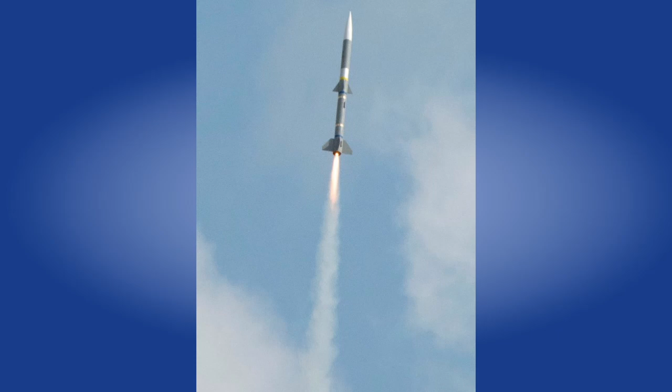In addition to that, I fly rockets, and that's one of the things we're going to talk about today. In particular, I enjoy scale rockets. This was back when COVID was rampant, and you can see that's a 3/4 scale AMRAAM air-to-air missile. And you can see that flies as well.

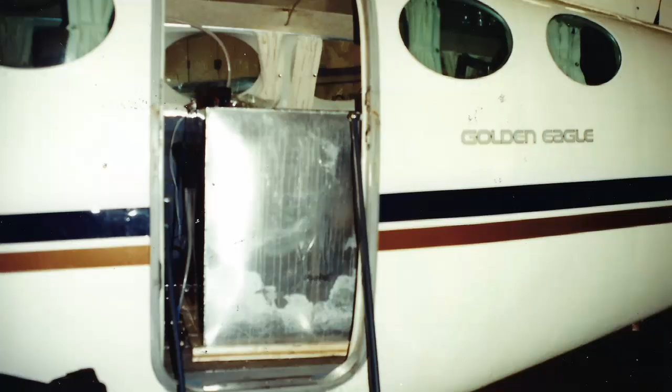So when you enter a Cessna 421, that's not normally the first thing you see.

That's a 100-gallon fuel tank. There were two of them in this airplane. We took all the interior out of the airplane and packed it in the nose luggage compartment and the wing luggage compartments, then put two 100-gallon tanks on board the airplane.

The reason for this is the first one I delivered in May, so I could do the standard Blue Spruce route, going from Goose Bay to Narsarsuaq at the southern tip of Greenland, to Reykjavik in Iceland, and hit Europe from there. But this particular airplane we were delivering in early February, and Narsarsuaq is not a place you want to be in Greenland in early February. So the only way to get it across at that time was to put two 100-gallon fuel tanks on board, leave from St. John's in Newfoundland, and fly nonstop to Santa Maria in the Azores.

Typically, when I fueled the airplane, I'd have all the doors and windows open and leave the airplane sit for 30 minutes so that all the fumes from fueling could get out before I even dared put the master switch on and start firing things up. It was basically a flying gas tank.

With the onboard fuel, I had 435 gallons of avgas available to me, which gave me almost 10 hours of flying time, about 8 hours to Santa Maria in the Azores. And I got a license from the FAA to operate that airplane 35% over the licensed gross weight of the airplane, and we used every bit of it.

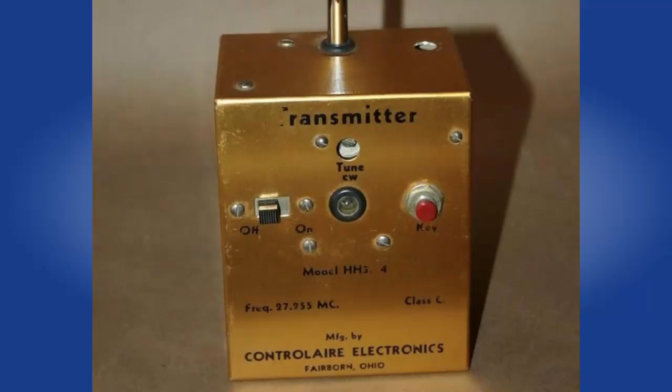All right, so next slide. I want to start this by talking a little bit about what's happened over the years in radio control airplanes, and then we'll jump off to other things, like what's happening on the frequency.

So early RC, and this is a transmitter from about the mid-60s, involved a very simple device. You had basically a wireless telegraph, and you'd key it up, and that would cause a relay to close. The relay closing would cause a rubber band powered escapement to turn, which would move the rudder on the airplane.

Originally these huge transmitters sat on the ground, and you had a button in your hand. As electronics got better, you had something more modern you could actually hold in your hand and push the button. Typically they were on about 27 megahertz, and everything back then was on 27.

So if you were flying your radio control airplane and somebody with a boosted CB keyed up, guess what? Your rudder moved and would stay over full until he got done transmitting, or you got done transmitting. From there they also got some ham-only frequencies in the 53 megahertz range.

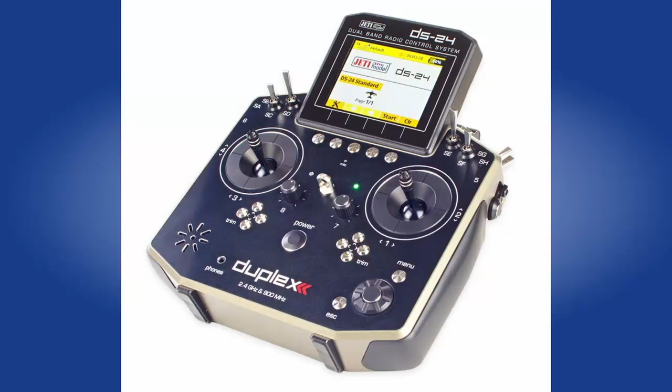Now, you can see that this looks just a little bit more complicated than that other radio I was showing you. There's a number of things this radio does that are really quite remarkable.

Not only am I sending out a signal to control my airplane, I'm getting telemetry back. I'm getting all kinds of telemetry back. So just to give you an idea, let's go to the correct slide.

I'm getting telemetry on signal strength, battery current draw, current used, air temperature, engine temperature, fuel level, system brake pressure, altitude, airspeed, GPS position, engine RPM, fuel flow, and a variometer, which tells me about my rate of climb or descent. I'm getting all this back. You can see that's one of the boards.

So I have a screen there, and there are a number of things I can do. I can have it change screens as I'm changing modes.

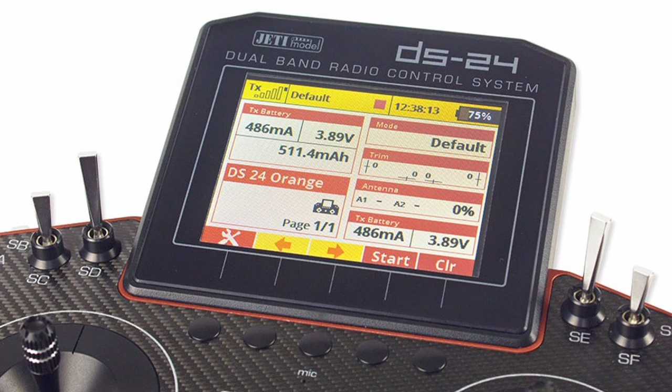So while I'm flying, just up and flying, I may be interested in how much fuel I have left or how much battery voltage I have left. Or if I'm flying a turbine-powered airplane, how my turbine engine's running, what the fuel level is, and I can have it tell me these things. It can say, hey, you're at 85% fuel, and I can tell it how often I want it to do that.

But now when I switch for landing, I'm switching modes, and my interest may be a little bit different. I may be more interested in airspeed than how much fuel I have left or what my engine temperature is.

I can also set any warning I want. When I hit a certain level, it'll give me a warning. One of the airplanes I'm flying right now, a small airplane, has a 3,000 milliamp battery, and it tells me things like 1,800 milliamps used. Then when I get to 2,200 milliamps, it gives a stronger warning that I've used 2,200 milliamps. So really some remarkable things.

Not only does it tell me these things, not only do I have live telemetry, it's recording everything on the transmitter. So I can go back at any point in the flight and see what my engine temperature was, my altitude, or my airspeed if I have a problem. Pretty remarkable things in modern day electronics.

We've gotten away from the 27, 53, and 72 megahertz bands, and these are now operating on 2.4 for a lot of the systems. The system I just showed you, one of the reasons I got it, operates on 2.4 but also on 900 as well.

The beauty of that is the whole world is operating on 2.4 right now. So if I'm flying in an area where I'm out in an open field but there are a lot of houses around, everybody's got a modem in their house, everybody's running 2.4. These transmitters only have 100 milliwatt output, so it's not a very strong signal, making it easy to get swamped.

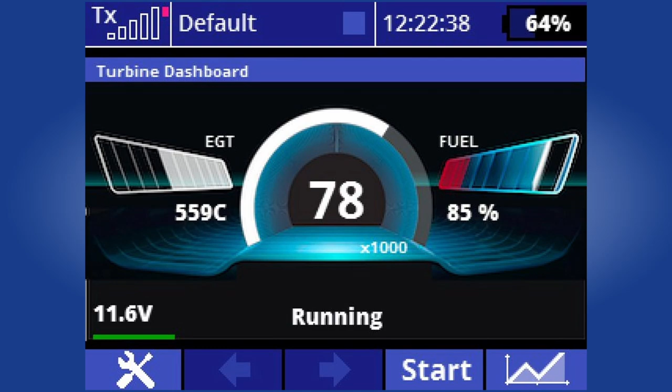All right, next slide. So coming from RC to rocketry, many of you raised your hands or told me you had flown rockets before. Rocketry has come a long way.

We basically have two classes. There's a number of classes, but I'm not going to get into it. Basically we have a big split: model rocketry and high-power rocketry. Model rocketry is anything up to 1,500 grams total takeoff weight, roughly 3.3 pounds, or 125 grams of propellant, or a G motor, whichever of those you hit is the limit.

Next. Yeah, just, there you go. One more click. All right, so big or small, rocketry hasn't changed that much.

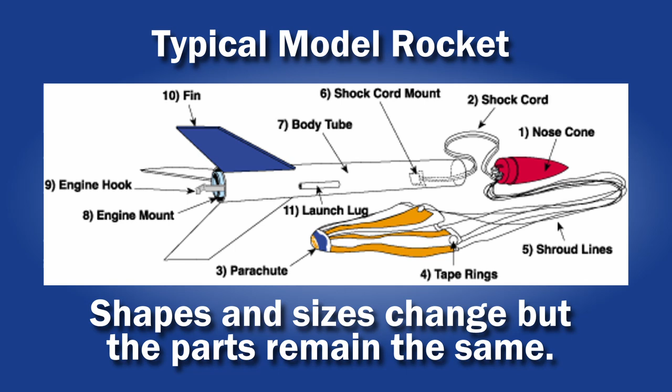Next. So the typical stages of flight: we have ignition and thrusting. Once the motor stops thrusting, the rocket coasts, and that's where you're actually getting most of your altitude—during the coast. Think of it like shooting a bullet out of a gun: it's accelerated for a very short period of time, but the coast is rather substantial.

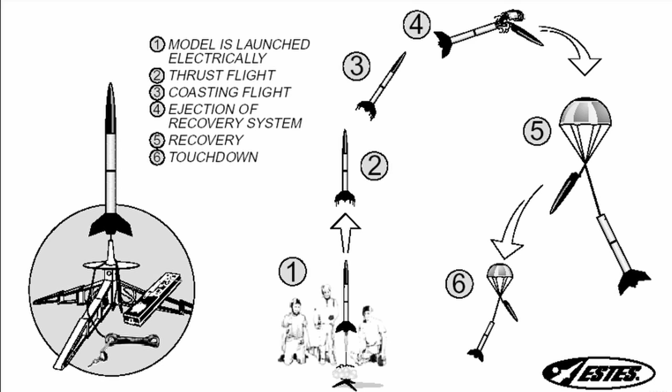When we reach apogee at the top, we need to do something to slow the rocket down. We deploy our recovery device, and the rocket floats down under parachute—a typical model rocket flight—and we get to do it again and again and again. I have some rockets with over 30 or 40 flights on them.

Those rockets—the larger one on the right probably goes 75 to 80 feet. The one on the left would go 120 feet.

I hadn't checked recently, but in 1993, I set a national record for quarter-A rocket glider. And to my knowledge, that still stands. So I've held for a long time a national record in rocketry, but for some very, very tiny rocket gliders.

So back to rocketry, just generally speaking. The standard Estes size rocket—this I'm holding right here is an Estes C motor. It's 2.75 inches long, 18 millimeters in diameter. We're going to talk about what a C motor means here in a minute.

I have 4 motors there that are all C6s. I have a C60, which we use for staging, a C63, which would be great for George's rocket here, sending it roughly 300 to 350 feet high, a C65 for mid-level, and a C67, which has a longer delay. The difference between those is the delay time—the time it takes from when the rocket motor stops burning, in coast, to when it fires a charge out the front to deploy our recovery device. A C motor in a little model like this Streak can send it 2,000 feet high.

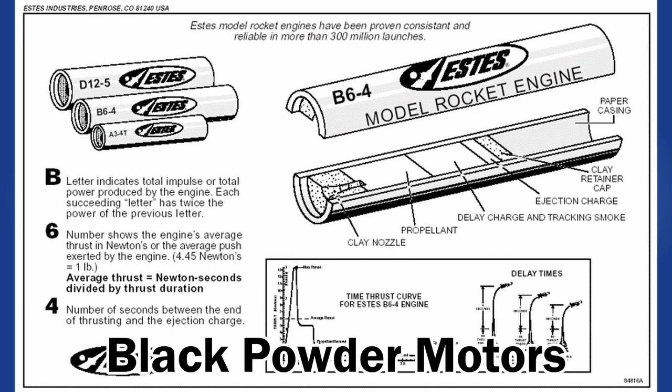The 6 in that C motor is telling us the average thrust in newtons, and there's roughly 4.45 newtons in a pound—so it's a little over a pound of thrust for that C motor's average thrust. The fact that it's a C motor tells me it's between 5.1 and 10 newton-seconds of thrust. The best way I can illustrate that: I have the C6 sitting there, and at home I have an E6.

You're thinking, well, one's an E, one's a C, but they're both 6s with the same amount of thrust. That's correct, except the C burns for just a little over a second, and my E burns 4 times that long. So when we talk about how much thrust is developed—basically a newton-second is the amount of energy it takes to accelerate 1 kilogram of mass 1 meter in 1 second. That's the short story of what a newton-second is. It's a measure of impulse—how much total impulse does this motor have?

So this is a color illustration because we're getting old—we don't like black and white, we like color.

Again, this is more of a C motor. Notice that this one is pretty full all the way from the bottom to the top, and could be any of the C0, the 6, or the 7. The difference with the 0 is it doesn't have any delay and doesn't have any black powder charge at the front. We use that for staging—we put two of those together, one on top of the other, and when the propellant wall ruptures at the top, it sends flaming propellant into the one above it, it lights it, and we have a two-stage rocket.

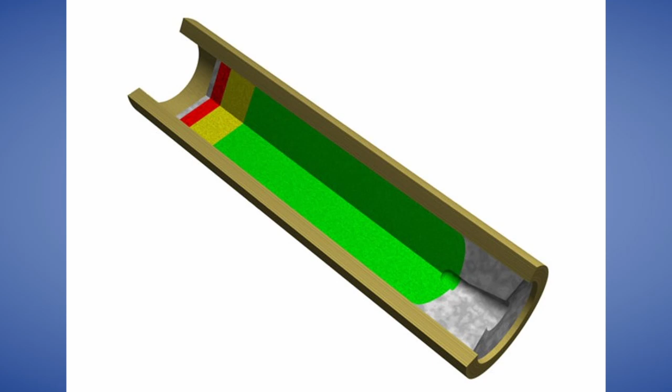So a typical C motor flight on this, if I use an A motor, I may get 200 feet, a B motor 500-600 feet, and probably a C motor would go to 1,100 feet.

For those of you who built rockets as a kid, this was a model rocket from Centuri, which Estes bought out in like 1974, 75. I redid it recently because I built that in the 70s, so it was getting a little long in the tooth. I did it in White Sands Missile Range colors. If you ever walk through the White Sands Missile Park, that's how their Honest John is done.

I love classic rockets, the ones from the 60s and 70s. This is an Estes Goblin with a D motor, which is twice the size of a C. It would go roughly 1,400 feet, which is again a very, very impressive flight. I mention these altitudes, and to you they're just numbers, but trust me, 1,400 feet is seriously high up for a small rocket like that.

So, talking about some more model rockets. I mentioned staging. You can take a small rocket not much taller than George's here, make it a 3-stage rocket, and go to 2,500 feet. That's a phenomenal flight, and it's going to be very hard to see at that altitude, which brings me into what we use our ham licenses for, because recovering something like that can be very difficult. And then the other ones are showing clusters, which we're going to talk about next.

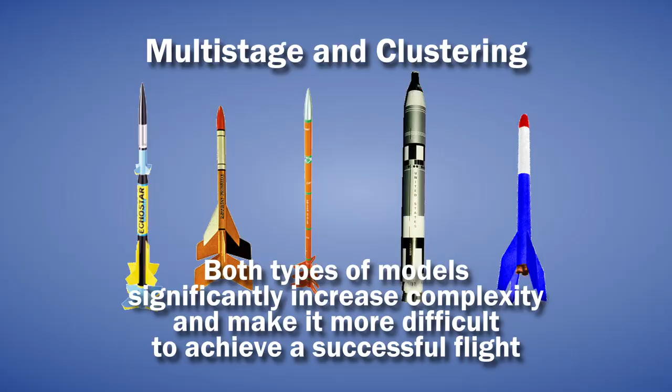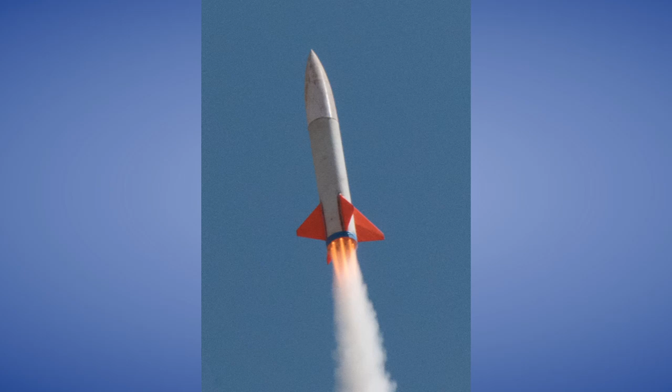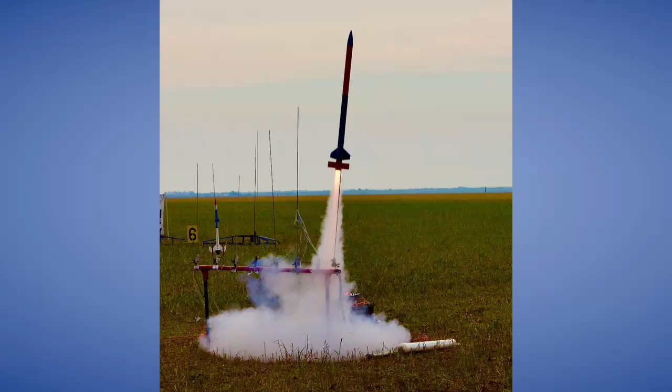Taking that same concept, this is a rocket I built years ago and have flown several times. It uses 7 C motors, just like this little motor I have here, except I have it set so they all light at once, staged to 7 more C motors. So this rocket has 14 C motors in it - 7 motors staged to 7 motors. And it's an impressive thing to see fly.

And because it's kind of big and kind of heavy, it still goes up to about 2,000 to 2,100 feet, which again is very high for something like that. But this rocket's big enough that it's a little easier to see than the small Estes.

So the question was, how do I determine the peak altitude? There are some wonderful rocketry programs out there. One is RockSim, but one of my favorites, which is a freebie, is called Open Rocket. You can load it onto your computer and build your model to determine how high that rocket's going to fly on any given motor. Some people don't like Open Rocket, but if you use it right, it's darn near perfect, and I'll talk about how close to perfect here in a second. That way I can pick the proper delay for my motors based on how high the rocket's going to go, which is important - I'll put a pin in that and talk about why the delay is so important in just a second. But that's an excellent question.

With that computer software, I can enter the altitude I'm launching from, the temperature, wind direction and speed, size of the rocket, weight of the rocket, length of my launch rod or guide rail, and get some very important information: peak altitude, what the acceleration is going to be, making sure it's stable, how long it's going to take from motor burnout to deployment, all those good things.

You had a question? So the question was, didn't Estes make a tool that you could use to determine how high the rocket went? The answer is yes, and they still do. The problem is that single-point trigonometry isn't so great, but if you get 2 people and take an azimuth, or even 3, 2 gets pretty darn accurate. You can accurately determine how high the rocket's going to go.

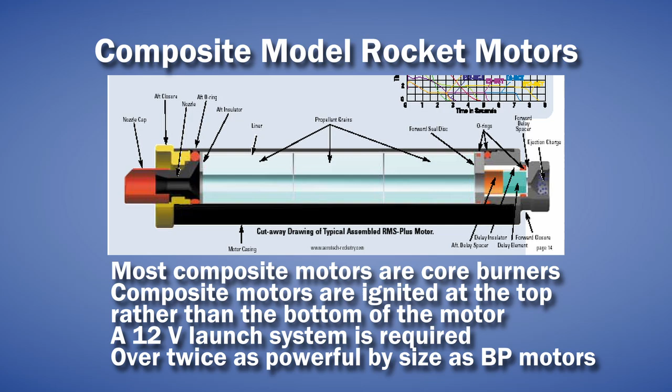This is just a nice diagram of the same thing. This would be a 2-grain motor. You can see the little split in the grain, nozzle at the bottom, the core in the center, delay grain, and there'd be the black powder charge at the top.

So just to put things in perspective - we talked about C motors, and I'm going to use C motors as my standard unit of measure, roughly 10 Newton seconds of power. Let me just take a look at my notes here.

This particular motor right here - this is the motor case that you're looking at. The fins are welded straight to the motor case, so there is no body tube per se. The body tube and recovery go on top of the motor case. This motor is a P-class motor, a P8500, roughly 72,000 Newton seconds of thrust, or the equivalent of 7,200 C motors all going off at the same time. I got a little video of this thing flying later. The motor alone on this is 110 pounds. So you can see I'm going from one extreme to the other.

This is a picture of this rocket I have flying right here, and I'm going to talk more about this in a second. In this particular picture, that was on an I-285. It was a relatively low altitude flight, just shy of 2,000 feet, to test tracking and electronics before flying it on big motors. I've flown it up to about 9,300 feet. In a couple of weeks, I may try pushing a little harder, up to about 11,000 feet.

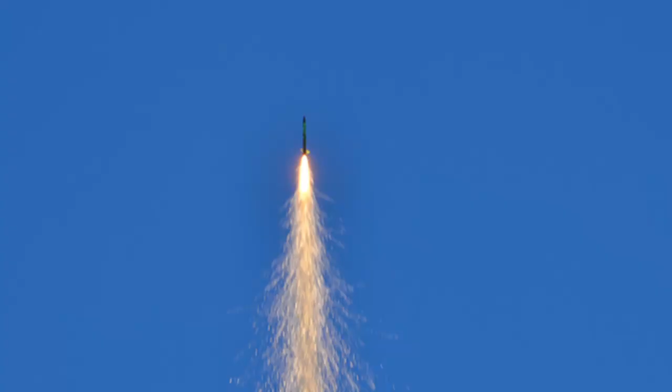Adding magnesium to the fuel produces what we call a sparky motor, and it produces quite an effect at the loss of impulse, because you're adding mass in the form of magnesium to create this effect. You're losing thrust in the rocket, but it puts up a very interesting flight. These are just a couple of the variations, by no means all of them - you're going to see rockets with red flames, green flames, sparky motors, or even black smoke. It just depends how we're mixing the propellant.

So here's what we want to see at the end of the flight: we want to see a parachute come out, we want to see the rocket come down under chute. This is your standard model rocket deployment - the parachute comes out at the top. Hopefully it comes out at the top.

So going back to your question before about knowing how high we went - as these rockets get bigger, putting the parachute, or our recovery, at the top becomes crucial, because at high speed putting a parachute out does ugly things. I've seen parachutes come out at close to Mach 1, and that is very ugly, I'm here to tell you. Even if it's getting most of the way up to the top, if it still has a lot of upward vertical movement and you put out the parachutes, it's going to be very hard on the recovery system. It could rip the parachutes to shreds, it could separate the shock cord. There's a problem - same thing coming downhill.

Once the rocket hits apogee, it starts its way down.

And if the rocket gets accelerated too far past apogee and you put out your recovery device, you're going to tear things to shreds. So it gets really ugly. It's important to know, if we're using a motor delay, how high that rocket's going to go and what kind of delay we need to hit the top.

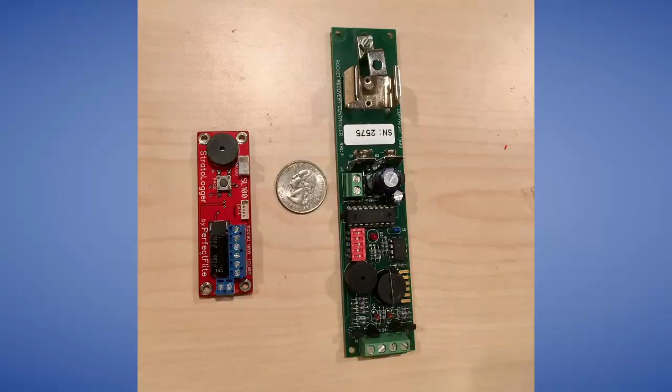So how do we get the laundry out at the top? On my larger rockets, much like this one, I'm not using the motor to get my parachute out. I'm using some electronics. This little guy on the right is an older version of a flight computer, which uses a barometric sensor that senses the rocket's acceleration and its altitude. And when it senses that the rocket's no longer gaining altitude, it'll fire a charge which will put out a drogue parachute, allowing me to come down about 100 feet per second.

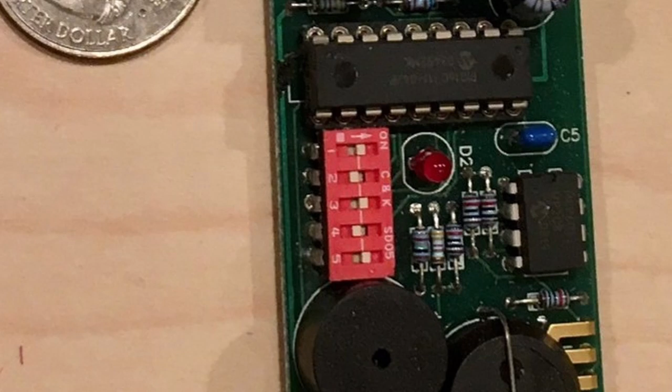And then I can program through a series of dip switches what altitude I put out the main. So anywhere from 200 feet up to about 1,200 feet, I can decide what altitude I put the main out, and the main will slow the rocket down to about 20 feet per second for a soft landing.

Now, these older altimeters had a couple issues. The first, if the rocket were to hit the speed of sound, you get a pressure wave as you go through Mach 1. The older, less capable programming and less capable sensors would sense that as a cease in vertical ascent, and it would put the parachute out at Mach 1. And that's how I can tell you I've seen many rockets that didn't like that very well. You see all kinds of pieces fluttering down out of the sky, because the second that happens, the rocket separates, the parachute comes out, is instantly destroyed, and then as the rocket's put on its side, it puts a bad load on everything, and it just tears the airframe itself to shreds.

The second thing with this particular altimeter is that it would only give me peak altitude. So when I got the rocket back, that's all the information I got. So what they started to do is this thing had a series of dip switches on it where I can program out, say, okay, I don't want you to do anything for the first 5 seconds. And that's a great idea.

So now as I'm transitioning through Mach and it hits that bump in pressure, it's not going to deploy a parachute. The problem is if I have some kind of failure, if the motor spits or quits or does something crazy, for 5 seconds it's not going to do anything. So you have to wait for that to come out.

Enter the more modern flight computer, and that's what this is. As you can see, it's a relatively small device, and I actually have one of those. After we have the meeting, I can pull that apart and you can see it. What that does is the sensor's better and the programming's better, so it understands Mach transition.

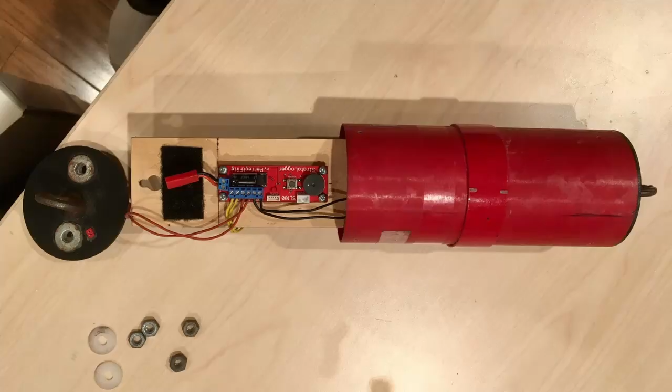Just a little bit next—this is the back side of it. You can see the battery. Notice those two tubes that are glued to the pallet.

They slide on some all-thread that's glued into that section, and you can see a switch there—just a very simple switch. It works with a screwdriver; it's nothing but a screw, and there are two prongs that come up out of the switch assembly. As I turn the screw in, it contacts those prongs and gets the altimeter doing its thing. So that's my on-off switch.

And then on the side here, if I spin the rocket around, you can see a little piece of nylon thread sticking out. That gets screwed all the way in to be flush with the tube, and that's the access for my switch that I can turn on.

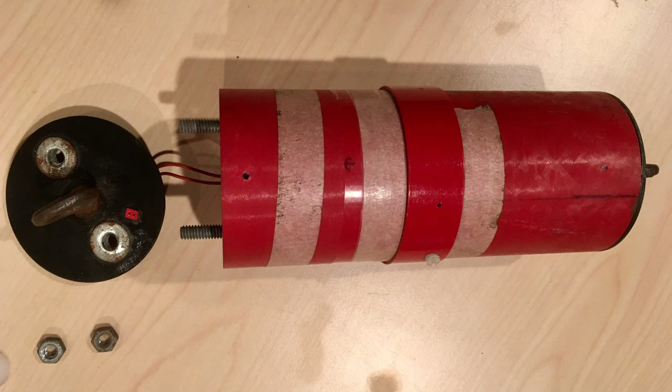That's just showing the all-thread coming out the bottom. You can see the top of the bulkhead there with a Dean's connector, which goes to an electrical match, which goes to a tube holding my pyrotechnic charge to deploy my parachutes—one for the drogue, one for the main.

The beauty of this is it doesn't matter how low or how high the rocket flies—my flight computer is going to deploy that drogue chute when it hits apogee. That's the beauty of it. I don't have to worry about how long the motor delay was, or whether I got it right in my simulation, because I've seen many rockets destroyed because the ejection charge went off too early or too late.

Going back to George's rocket here, which I talked about briefly before—I showed you the picture with the C6-0, the C6-3, the C6-5, and the C6-7. On a C6-0, if I launch this, the motor would burn out maybe 75 feet in the air, the parachute would come out and rip the rocket to shreds. If I fly it on the C6-3, because this is a relatively big, heavy rocket, it's going to reach apogee, put the chute out, and that's probably going to be pretty optimum.

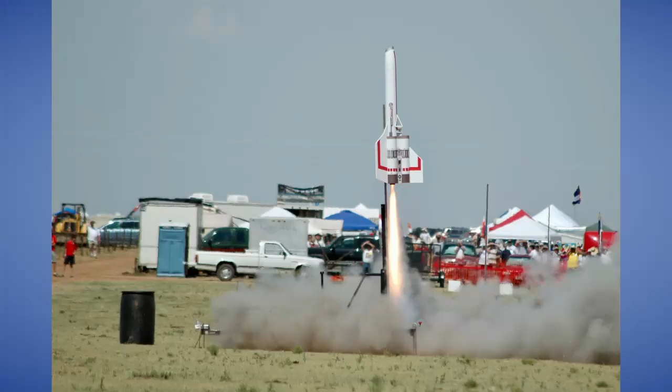The reason I brought this picture and included it in this presentation is not so much to show you I was hanging out with the Hooters girls, but to point out that unlike the other rockets, this is not a very aerodynamic vehicle by any stretch. The nose cone front is slanted, and it's got all kinds of weapons pods and other pods sticking out. There's no place I could expect clean airflow over this rocket for deploying a flight computer, which creates a problem because I don't want that flight computer to prematurely deploy, or delay the parachute deployment.

I love this picture for a number of reasons. On this particular day when we flew this rocket, there were about 2,500 people out there and the wind was howling. I looked at him and said, I don't think we're going to fly this thing today. And he said, well, let's get it ready for flight. I said, why? And he said, well, we're out here, what do you plan to do? So we did it, and it took us about 3.5 hours to get everything loaded and packed and ready for flight. About 10 minutes after we got it ready, the wind just stopped.

I mean, absolutely stopped. We grabbed this thing, and it's 65 pounds, and we go running out to the launch pad not knowing if the wind's going to kick back up. We get it loaded and send this rocket up to about 5,300 feet, which is a very impressive flight for a rocket like that. The parachute comes out, we're high-fiving each other, and this thing drifts about 1.5 miles away. We go out to recover it, excited and celebrating.

Then we pick the thing up and realize we didn't think this through. We have a 65-pound rocket. Now it doesn't have propellant in it, so it's maybe 57 or 58 pounds, since we burned off about 7 pounds of propellant. We have to carry this back. Wasn't a good plan, but the rocket did put up a dynamite flight.

So we needed something else to make this work. Enter a different kind of flight computer, known as an RDAS, Rocket Data Acquisition System. This uses accelerometers to figure out what the rocket's doing. It does have a barometric sensor too, so we could do things barometrically, but in this case we programmed it to use accelerometer data only. The accelerometer senses the rocket accelerating, then stopping and leaning over. It has accelerometers in all axes, which becomes very important when we look at how the rocket flew, things like roll rate and pitch change throughout the flight.

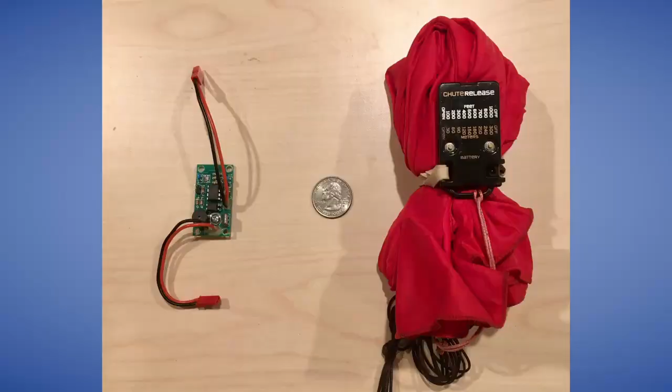A couple other interesting devices here. This little device on the left side is one of my favorite devices. It's a kit made by a company called Egg Timer Rocketry, and it's referred to as an Apogee. What it does is use a barometric sensor.

I can take some of my older model rockets, maybe something just a little bigger than this, and outfit it with that Apogee, and I always know the chute's going to come out right at the top, regardless of what motor I fly, regardless of how windy it is and how the rocket weather vanes. When it reaches peak altitude, it fires that charge, and then it records the max altitude. So it's giving me max altitude, and it's firing the thing at apogee.

The kit for this little guy is $15, and it takes a little time to put together, but it's the perfect recovery device for anything coming out with a single chute. Now, the device next to it is one of my second favorite devices.

It's a bit substantially more expensive, but it's the chute release system. Imagine we take George's rocket here and shoot this to 2,000 feet on one of my composite motors. We put the parachute at the top, it's going to drift 2 miles. But now I have the chute release thing in here, and what it does is hold the parachute together, so it puts the parachute out, but while the parachute's out, it's not open.

The rocket's going to come down 60, 100 feet per second, somewhere in there, and when it gets to a pre-programmed altitude, it releases the parachute and the parachute opens. Pretty cool device. So for some of my older rockets, to retrofit them with some of that equipment is very good.

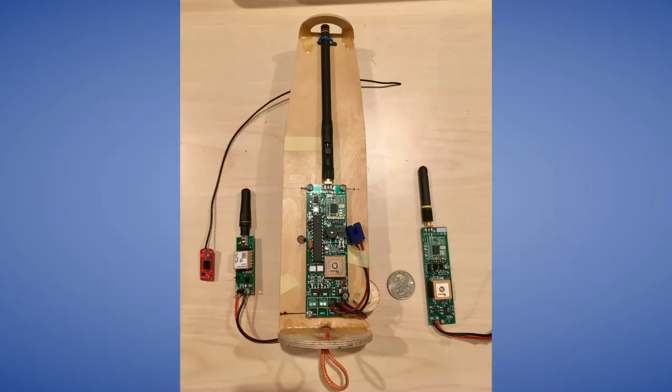So we've talked a little bit about rocket motors. We talked about parachutes and how all that stuff works. But once the rocket's flown, particularly as we go to those higher altitudes, even just taking a rocket to 2,000 feet, recovery becomes an issue. Where'd this thing go? How do I find it? So here are a couple of the devices we're using.

This rocket I have in front of me has this in the nose cone. For those interested, I can take it out and show you that board. That is a GPS tracking device that also has telemetry, that also is a flight computer. So not only am I able to see where the rocket is, I can see how high the rocket is, and by seeing how high it is, I can determine what's going on.

I can see it reach max altitude, and if it's falling bizarrely fast, I know that's really bad - I didn't put out a drogue chute. If it's falling at a medium speed, I can tell, well, at least I got the drogue chute out, and then at my pre-programmed altitude, I should see that rate of descent slow down, and I can see that in real time.

Now, while this is what I'd describe as a basic telemetry device, there are other devices giving you telemetry back down in real time, not only in terms of altitude, but acceleration, as well as roll rate or pitching. It can give you a lot of information about what the rocket's doing in real time - velocity, Mach number, all that stuff in real time, which is really nice. And then it helps you find your rocket.

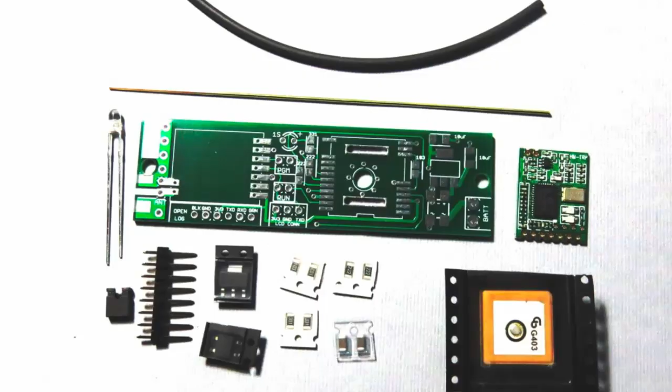So this is what one of those kits looks like. It's not terribly hard to put together, but there are 2 things I find out about putting these kits together. It uses surface mount technology to solder, so I find out really how good my eyesight is - it's not so good - and how steady my hands are. I use what I refer to as geezer goggles, about 4 or 5X glasses, to put these things together. And I have to be in the right frame of mind, and my wife has to be out of the house.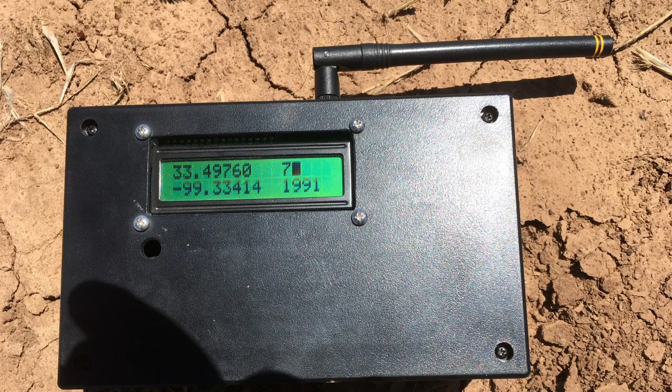Later you're going to see live telemetry - some people have it hooked to their PC and they're getting live telemetry on Google Maps, literally drawing a line in the sky of where the rocket is and then showing on Google Maps where the rocket landed. So it gets pretty sophisticated.

Just to give you an idea, this is a rocket I flew several years ago. Again, I like scale rockets - this is a 1/2 scale NASA Hyperion launch vehicle, powered with an M-class motor. Looking at my notes here, that motor is 6,268 Newton seconds, the equivalent of over 628 C motors all going off at the same time, just to put things in perspective.

The bottom up to about right here is rocket motor. From here to here is space for my drogue chute. From about here to here is space for my main chute, and then inside the nose cone, like this one, is my tracking device.

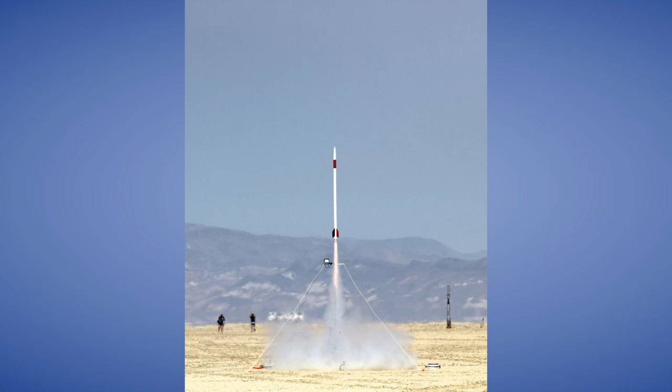There it is leaving the pad. You can see that rocket's about 9 foot tall. That's a pretty impressive flame coming out the bottom of that guy.

So this is all the things my flight computer's giving me. In this case we uploaded it after the rocket landed, but with a live telemetry system I can get all this in real time.

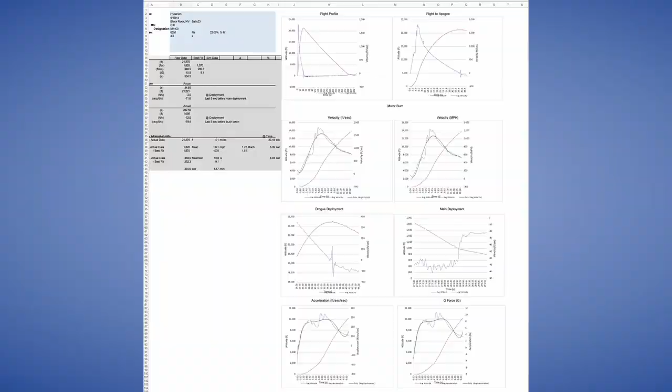So what am I getting? I'm getting some really good information. Apogee, 21,275 feet - not bad for a little scale model rocket. By the way, in the Black Rock Desert you can follow that all the way up to apogee, it's a wonderful thing to see. You go to Kansas in the summertime, sometimes the skies are clear, sometimes they hit a haze layer at 5,000 feet and they're gone. A couple other things it gave me - velocity.

If you notice, it's showing 1,820 feet per second as my max velocity. But that's a little misleading because you hit a bump at Mach, which throws your data off, so you can see a best fit. As a practical matter, if you smooth the data, it's 1,570 feet per second, which turns out to be about Mach 1.51. Pretty impressive.

Some other even more important information - well, how did I do under drogue? So it's telling me my drogue chute came out, and that my average rate of descent was 71.6 feet per second, which is pretty close to that 80 feet per second I was looking for.

So my drogue chute was properly sized. And my main chute, while it was programmed for 1,100 feet, actually deployed at 1,095 feet, and my rate of descent was 19.4 feet per second, very close to my desired 20 feet per second. Going that high and using that dual deploy method, I recovered this rocket a half mile away from where it took off. So really pretty impressive.

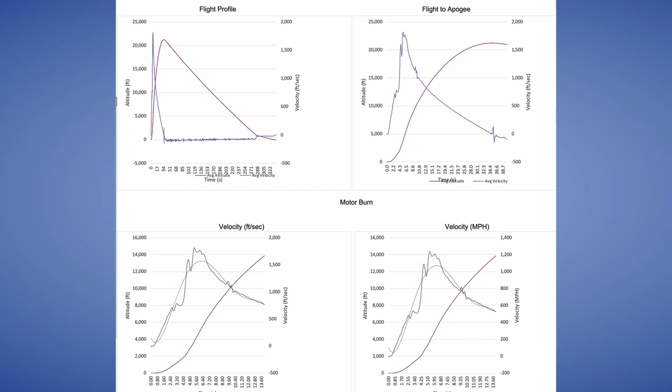Next, just showing you some of the fancy graphs and stuff. I can take a look at velocity, time to apogee, flight profile. More talk about how violent my event was when I put out the drogue and the main, because all of a sudden that rocket, you put a chute out, it stops pretty fast. G-forces, acceleration.

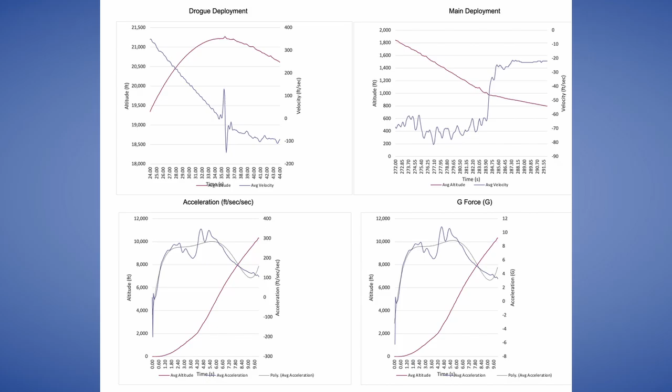So, advanced telemetry systems. Right here, I have a substantially more advanced telemetry system. This goes in the rocket. This is called Kate. And not only does Kate produce all this data and downlink it, she talks to you. We'll have to be very quiet because it unfortunately comes out very soft through the audio system, but we can actually hear what's happening with the rocket in real time. She's telling us what's going on. So we're going to listen to that.

And this particular system is on a 900 frequency. Pretty crazy looking receiver and antenna. But I can also hook this up to a PC to get the information in real time. So go next, but that is a very, very pricey system, to say the least.

As you go higher, black powder charges don't work well. Now you're going to say, well wait a second Dave, black powder is an oxidizer and the fuel all in one. The reality is when you fire a black powder charge, one grain is transmitting the heat from that grain to the next grain to cause it to ignite. The higher you go, the less air there is between those grains, the less heat transfer you have, and at very high altitudes, the black powder really doesn't work well at all.

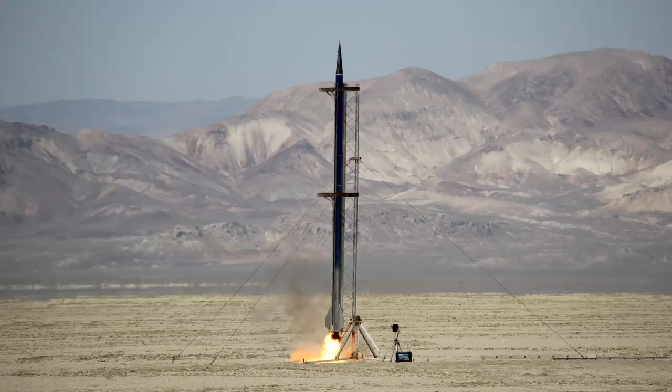So let's take a look at how this flight went. Well, that looks great. Good start. Next. Oh, Houston, we may have a problem. Typically, black smoke is not a good sign. Next.

Yeah, so you can see, any expensive equipment you have like that is now part of this collection. What did Kate say when that happened? She wasn't speaking anymore. So how much was it? Oh my God. This is not my equipment, it's a friend of mine, so I didn't buy it. I want to say the receiver's like $1,300, and the airborne equipment's like $800 or $900.

Yeah, that's not pretty. So one more. I want you to watch this video very carefully, because one of the things you're going to see is some fuel grains coming down out of the sky, which I've had the pleasure of dodging burning fuel grains, which is kind of exciting. One of the things that happens, the part of the rocket that does work, because I talked about that flight computer, will put out a parachute even if things go bad, and it did.

And it put out a parachute on this thing. This is just a fixed ground camera because nobody's crazy enough to be this close to this rocket when it takes off. But you'll see that what's left of the rocket comes down softly on the parachute and lands right in the fire so it can be burned up with everything else. And that, you're going to see that come out of this corner. So if Kate survived, she got burned, go ahead and crank this up.

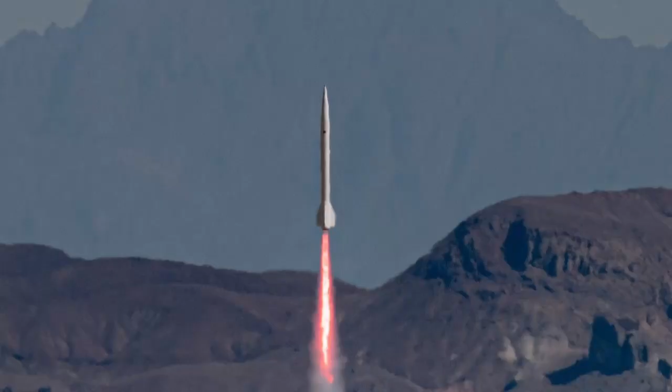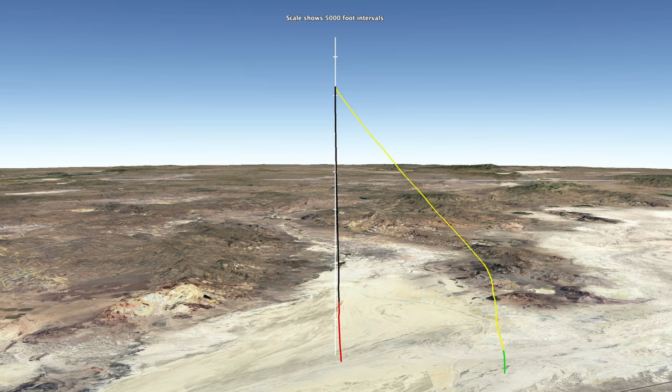So my rocketry goes in a little bit different direction than everybody else's.

Any aviation history buffs here?

That model kind of circulated around the rocketry community, and I get this phone call from this guy, George Welsh, who's the curator of the Flight Test Museum at Edwards Air Force Base. To make a long story short, it's now on display at Edwards Air Force Base between the X4 and the M2 F2 lifting body.

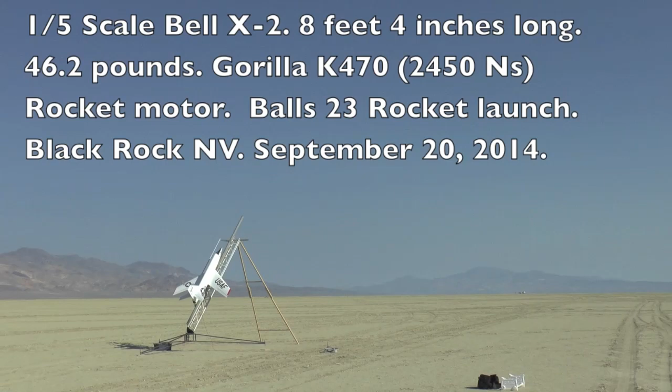Okay, clear sky. So that's that Bell X-2. This rocket is flying in 5, 4, 3, 2, 1. Ignition.

So he's using a telephoto lens to zoom in on this thing. The model is 8.5 feet long, 46 pounds at takeoff, about 3.5 pounds of propellant.

Come on, do a loop, Jay! You will - that's a K470 motor. A K470 motor. I'm flying it. 2 years building this thing, I'm flying it.

Now, the nice thing about flying about Black Rock, part of the lake bed we're in is 17 miles wide and 23 miles long. I have a 23-mile long runway for this thing. Perfectly flat.

So it was powered for 5.3 seconds during the boost, and now it's all glide. And that's the way the full-size X-2 was - rocket-powered, and it did its thing and came gliding back. If you've ever seen the newsreels from 1956, God, they look just like that.

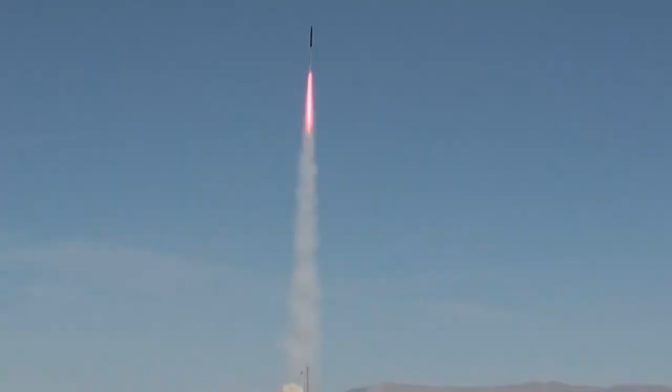In slow motion, and I want to talk about this momentarily. So after that happened is when I started dodging fuel grains that were coming out of there.

So the question was asked before, do we do anything important with the telemetry that we get down? What actually happened on that flight is the fuel grain, during the burn, parts of it came apart and momentarily clogged the nozzle, causing the motor to overpressure, and you saw the result of that. That was determined by the telemetry we received and a close examination of the video of what happened. We were able to corroborate what happened, because the telemetry showed that just before the rocket blew, there was a deceleration event, and that happened as the nozzle clogged. If we didn't have that telemetry, he wouldn't really know what the problem was and how to fix it for the next flight. So that's a great example of the value of having that telemetry live. If he didn't have the live telemetry and used the equipment that I'm using, that information would have been destroyed with the rocket, and he wouldn't have that information.

Yes, sir. Did you say he built that motor? He designed and built that motor. So there are those of us that are using pre-manufactured fuel grains to build up our own motors, or pre-built motors, but a lot of people will make their own motors. And that's a whole hobby onto its own.

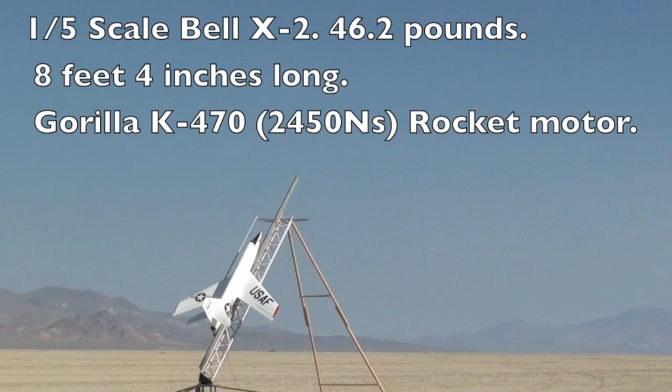Okay, there's one more video, let's check that out. You can see the value of live telemetry. In large motors, a lot of the times... well, I'll let this run and talk about it. You're going to see a close slow-mo of the launch itself, then we'll jump to what it looks like sitting in the cockpit of this thing. This rocket is flying in 5, 4, 3, 2, 1, ignition.

No good launch is any good without some slow-mo.

So now you get to see what it looks like inside the cockpit.

By the way, this video was taken in September. It'll be the 10-year anniversary of the flight of this thing. Is this flight number 2? This is flight number 2. So while you're watching it set up, the first time I flew it was...

interesting. It was kind of a cloudy, overcast, breezy day, we had some storms. I flew it when it was overcast, which actually worked out very good for me because I wasn't going to go into the clouds. The second time we flew it, it was crystal clear and beautiful, which is one of the reasons I agreed to let the Flight Test Museum have it, because I couldn't possibly get better pictures and video than I got on this flight.